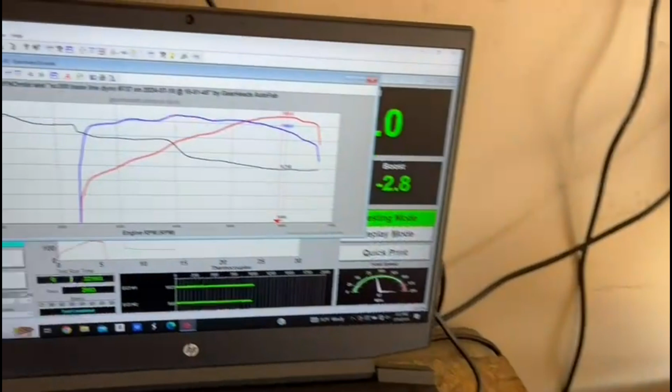Today's the big day you've been waiting for. We're gonna hit the dyno. We're here at Gearhead's Auto Fab with my buddy Jarom. He is gonna help me out with the dyno today, teach me how to dyno. We're gonna see what the SC is making before we start strapping on bolt-ons, before we do a standalone ECU. So let's go check out the dyno, check out the shop.

What's up, Jarom? Hey, how's it going? Good to see you. Good to see you. Hey man, your shop's looking great. You got a sick dyno setup.

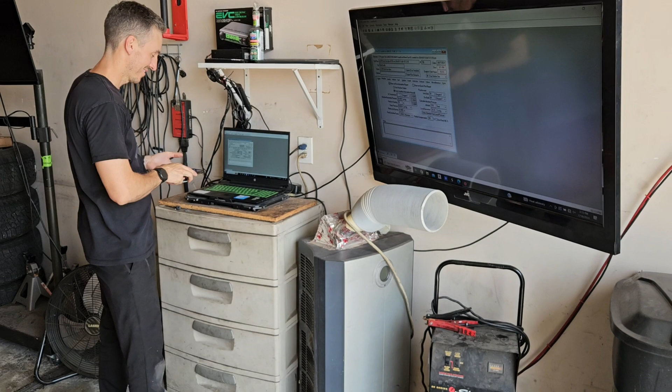Tell us just a little bit about the dyno setup real quick. This is just an inertia-only dyno, so basically there's a big roller in the ground. It knows the weight of it and it can equate your horsepower and torque. Right now I'm putting in the weather and the conditions for the day, and that kind of just gives most dynos everywhere a similar type reading.

So we'll set this all up, and we put in a few factors as well, like the size of the engine and stuff like that. And then we strap it up to the roller and just do a few tests, get a good baseline, and hopefully we can get a starting point for what your car's making currently.

That's fantastic. Well, thanks for having us out. We're really excited to be here, and hopefully the guys online are going to learn a little bit about the dyno process and it might motivate them to come on out themselves. So appreciate you having me out. Yeah, no problem, man.

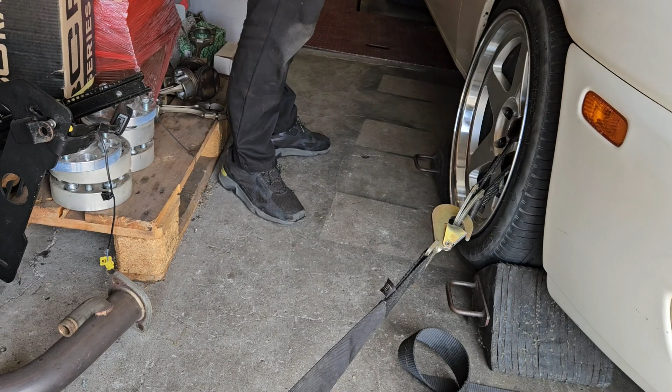All right, so we're chocking it, we're tying it down to the rim. Yeah, just to keep it from moving around too much. Sick.

I'm excited to show you. Yeah, so I ended up pulling out 305 pounds so far. Yeah, that's fine. Just throw the doors away and you'll have 705 pounds. Literally. Somebody needs to make a carbon fiber door shell. Yeah, can you imagine? I actually think it's the heaviest thing on the whole car. Yeah, absolutely. That's what I heard before I bought it.

I wanted to show you this fun one. So Antigravity is like $600 to $800. This one at Walmart, lithium ion, is 175. Yeah, I use the one on Amazon all the time, Noco or whatever that is.

Noco. So Jarom, how long have you been at this shop here? I think I've been here 8 years. Just about 8 years. And then I opened my first tuner shop in 2006. Oh, here, I brought you a water. Thanks. So it'll be like 20 years if I make it 2 more. I'm 18 years this year. Very cool. That's awesome, man.

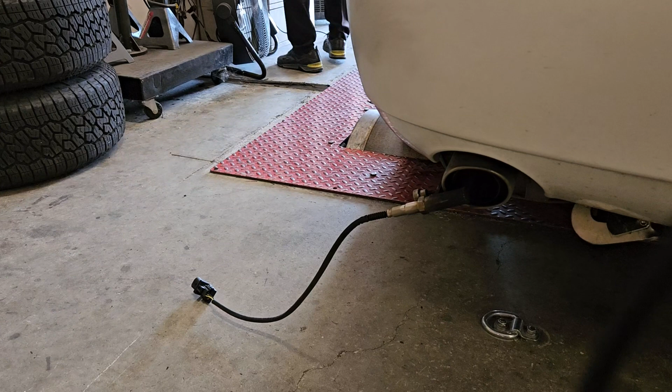All right, so we got the car all set up. What's next, Jarom? Well, it's strapped down, so we're gonna hop in the car and set up one sensor to read the RPM, and then we can start making dyno pulls. All right, fantastic. So what are we connecting here?

This is just gonna read the exhaust. Yeah, this is the wideband air fuel ratio. You were mentioning that you had installed one in your car. This will give us a chance to see if yours is reading similar, just to make sure it's hooked up right. Perfect. That way when you're driving around, if you see weird things, I can tell you what to look for, and we'll know that it's accurate.

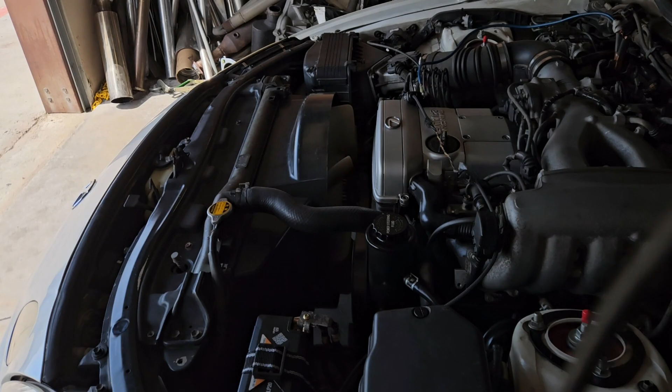That's fantastic. Okay, and then in the front we connected basically a sensor that reads the spark; it's an inductive clamp. So that gives us an RPM reference, because torque times RPM divided by 5252 is how you get horsepower. Fantastic, I didn't know that. That's the equation. Okay, say that one again.

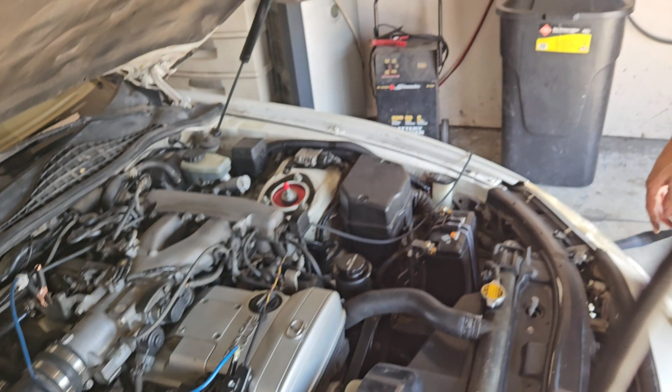It's just basically applied torque. You can only read how hard you accelerate the roller, but they multiply that by RPM over 5252, and that's how you get your horsepower number. Horsepower is just how long you sustain torque. Fantastic. Okay, very cool. I'm learning a lot here. All right, let's start her up.

So we have really good RPM signal now. Awesome. Go ahead and put it in first gear and just lightly, real softly roll forward just to make sure it's centered on the dyno. So you don't have to steer because you're strapped down. Yeah, you just kind of let it chill. Okay. So just go ahead and go first gear like you were going.

Okay. Like you would normally drive? Yep. And go to second gear. Still a 5-speed, right? Yeah, it's the factory 5. That's pretty fragile. Go ahead and go to 3rd gear. And go ahead and just floor it whenever you're ready. And it will record, go all the way to red line, wide open throttle.

Okay, here we go. All right, here we go. All right, we got 1st gear. We got 2nd gear. Here's 3rd gear. All right, let's rip it. Oh!

So yeah, I mean 193 to the wheel. I'll get that read down. Okay, so I have the air fuel ratio sensor hooked up on the back of the car, the one that's coming from the dyno, and we can compare to the one that you installed, you said recently. Yep. This way we can kind of get a sense if they're reading accurately.

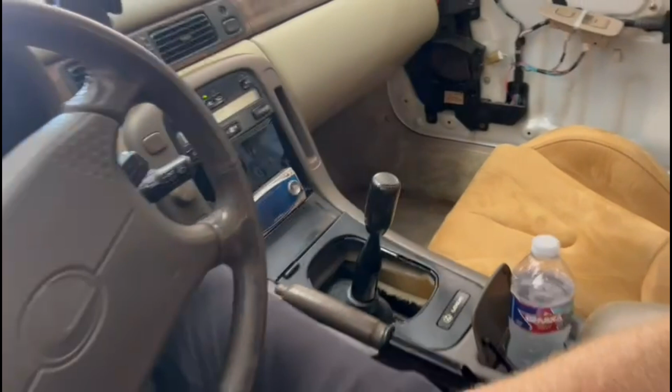And right now, they're really close, right? We're really close. 0.1 or so. Yeah. I mean, really, really darn close. I would say right now, like 0.1, 0.3, yeah. Yeah, and yours is way upstream, mine's way back, and if they're that accurate, I would say that your install went really well and you did a great job. Fantastic, thank you so much.

Okay, let's do this dyno pull and then we'll get to see what your horsepower looks like and what the fueling looks like. Let's do it. Okay, go ahead. Okay, go ahead.

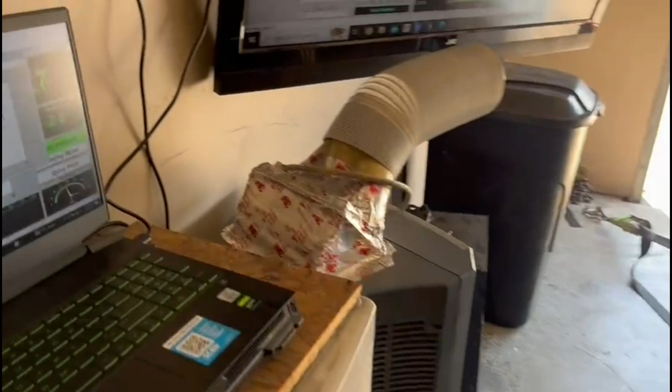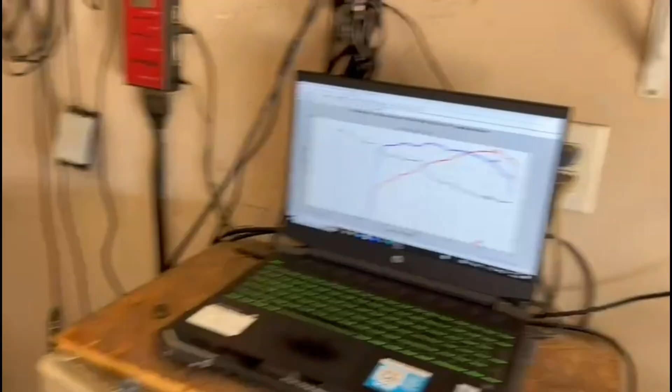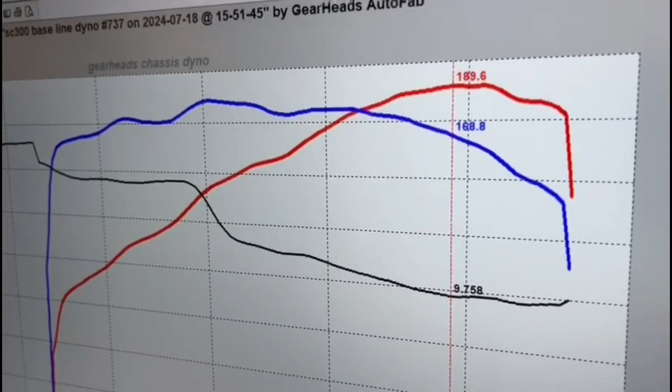Okay, so you mentioned before that it was reading kind of on the rich side. Yeah. I can confirm that it is, yes, definitely fairly rich. Okay. That's what I was worried about. Towards the end of the run, it is very, very rich. 9.7 air fuel ratio. That's super rich. Is that dangerous? No, it's safe. It's really, really rich. It could cause rich misfires essentially, but it's not.

So what I think is happening probably is because the car is heating up. The manufacturer uses temperature to add fuel just to keep the engine cool under certain conditions. Okay. But that is still quite rich, and if we were tuning it, we would just look at the temperature compensations and adjust accordingly instead of just dumping a ton of fuel like the manufacturer did. So they're just trying to make sure in every scenario you can't hurt the engine, you know? So, yeah, that's crazy, crazy rich.

If you notice too on the lower RPM points, it's about where it is under light load. That's almost stoichiometric, that's in the 14s. Yeah. And then it should go into like maybe 12.5, 12.2 even. Right, but it's going all the way down to like 10s and 9s. That's very, very rich. So yeah, there's definitely a lot that could be had with tuning, but it would probably only equate to like 10 or 15 horsepower or something like that. Okay. So it's not too big of a deal.

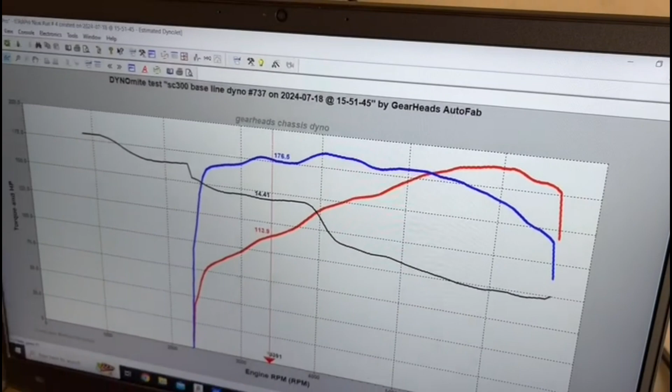And ultimately, since you're not tuning it currently, you can keep the car like this. It'll stay safe under hot days, you know? Okay. Yeah, pretty cool. That is amazing. That's pretty good power for stock, you know? Sweet. Okay, so it going that rich is not dangerous at this point.

No, usually lean is dangerous because it creates more heat and heat creates problems. Right. But rich is okay to a point. If you get so rich that it can't actually light all the fuel and misfires, that can be kind of bad. Mm-hmm. But I didn't hear any misfires. I generally listen for that kind of a thing. Right. So I'm assuming it's just doing what it's been programmed to do for temperature. Right. Okay, that makes a lot of sense.

So somebody else told me, and that's why I'm here to talk to a pro, that we could manually advance timing on this car and get more out of it. Tell me why that's a bad idea. It's not that bad of an idea. You could certainly do it, but it's just a global change. Let me show you in your engine bay really quick.

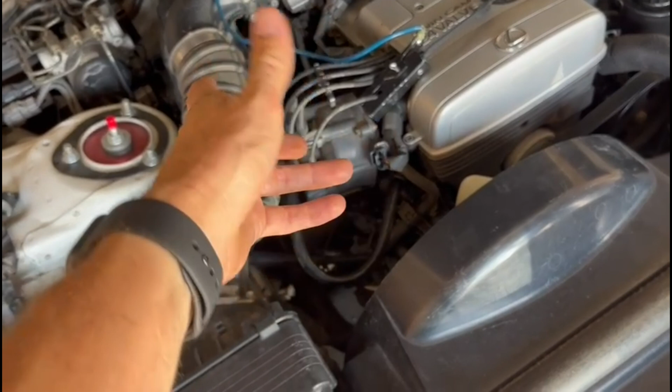All right. Essentially what they mean is you could advance or retard the distributor. So the computer uses the sensors in here to allocate where timing is. And if you rotate it forward or backward, it just moves the entire timing curve forward or backwards.

I would think, because the stock engine hasn't been modified in any way, yes, you could maybe advance it a couple degrees and possibly get something. It's usually not a lot, and it's a lot of fuss for kind of small potatoes.

If you were on something that was tunable, the problem with globally changing something is you can end up undertimed in places and overtimed in other places, just because you're now also giving idle extra RPM. So now maybe idle's really high and lopes or does something weird just to get that extra 5 or 10 horsepower at the top end. Right. So it's marginal and probably not worth it. But yeah, so mechanically it's not on a curve, so you're sacrificing one thing for the other thing.

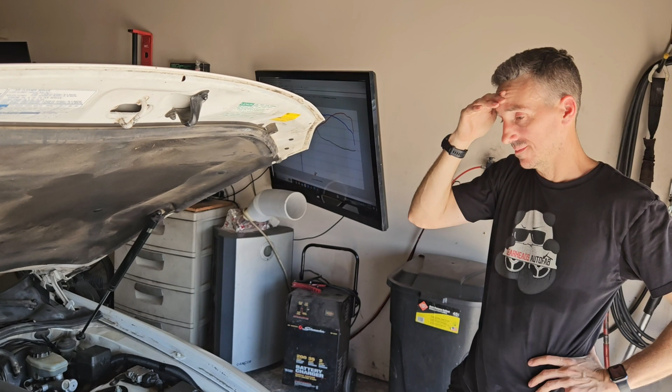Yeah, absolutely. We have bored out the cats. We've done a cold air induction to the stock, which probably didn't do a whole lot. We're getting decent horsepower, is what Jarom is saying. What would you recommend as next steps that would eventually allow me to do big things, but we could do some small things in the interim?

I think the biggest hurdle on any build, and this is kind of how I decide whether to build a car or not, is if it's tunable. It doesn't matter what we do power-wise to this engine, you're gonna have to recalibrate. If there's no way to do that, then you're stuck. There's certain cars where there's no way to retune the factory PCM, and there's other cars where you just have to go to a full standalone computer. You kind of need to make those arrangements first, and then you can really start seeing more data and adding horsepower and tuning correctly for the situation.

Right. And you mentioned the other day, I think you recommended a Haltech. Yeah, it's just easy. I've done a bunch of them, so I have a lot of good base maps for this engine on a Haltech. And the user interface worked really well for this car, so it seems like that company spent a lot of time developing it. There's a few other companies popping up with other ECUs that I've used recently, and I don't like them. So I still think Haltech is the best choice.

Okay, and you mentioned the Haltech 2500. Haltech 2500 is just the highest model, and it has the most inputs and outputs. You may or may not need that. You could probably do a 1500, where it's a distributor car. You probably have less inputs and outputs, so you'd have to look on their website and see what they recommend. Right, and so if we went with the 2500 to get me going to where I could bring it back in here, would that be the ECU and then the harness specific to the car?

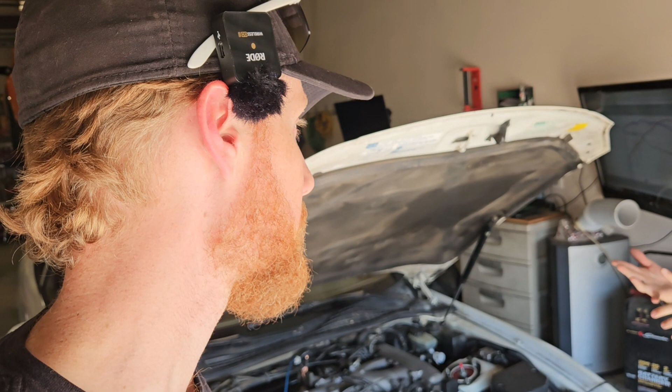Yeah, you get a Haltech jumper. I think they make one that goes from your chassis into the Haltech. And I always tend to buy three things. I buy the jumper harness that connects the ECU, and then I buy their wideband, because their wideband module will communicate over the network, and network speed's way faster than analog speed. I want to have at least air fuel data as fast as possible. Interesting. So from the time you go wide open throttle might be 1/1000, I want it to already be adjusting and predicting, and I need it to have super fast speed. So I always buy the wiring harness, the ECU, and the CAN wideband.

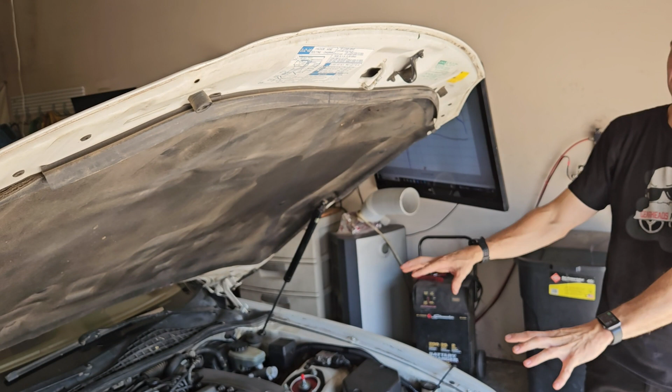Okay, fantastic. And if we did that, you could tune and maybe get a few more horsepower as is, is that correct? Yeah, I would think we'd be able to get a little bit more. A lot of times with all the same factory stuff that the manufacturer tuned with, they probably leave some margin there, but it's probably not huge. 10%? On most cars, and then once you start doing mods, much more. Yeah, so then mods I could do in stages. Immediately turbo it. Well, that would be ultimately, if I could afford it. That's what everybody does, yeah.

I would love to do that, but what if we did something like headers and open up the air box? Yeah, the basic stuff would be headers, exhaust, intake. So just airflow mods. Airflow mods, cooling temperature mods, and then stuff that'll make it feel better to you is what you're already doing with lightening the car. That obviously makes it feel faster. Yeah, you can certainly do that kind of stuff. The other thing you can kind of do preemptively is anything related to cooling.

Like this radiator looks like it's not going to last that much longer. Yep, it looks like the plastic is maybe seeing too many heat cycles, so it might be time to upgrade some of your cooling related items to get ahead of the curve. Like if you go turbo on this car, you make boost, and then all your cooling system falls apart. Maybe you do your ECU so the engine's tunable, you do your cooling mods like oil cooler, coolant stuff, so you're ready for that. And then it makes the transition into forced induction way easier. Okay, well, I think that's the route we're gonna go.

Now, if you guys, I may not have posted that video yet, but if I haven't, I actually installed a Super AFC. I don't have it plugged in right now.

Jarom, tell us why we shouldn't run the Super AFC. We're gonna make sure the guys know not to install the Super AFCs. Why is that bad? The funny thing is I've uninstalled probably 30 of those things in the last 10 or 15 years. When they came out, it was kind of to be able to make some tunability on cars that weren't tunable, in the early and mid 2000s. And the problem with it is if you take a timing signal from a distributor and modify it, you're globally modifying it, which means you're increasing the timing at the high end, but also making issues in other places. So it's hard to explain.

It's worse than that because usually it uses an airflow modifier. So if you use an airflow modifier to fix your air fuel ratio to make more power with air fuel ratio, it will also move the timing accordingly. So if you reduce the fuel to make it leaner to make more power, you're also increasing the timing. So you're making it leaner and over-timing, those two items are how you blow cars up. Too much timing and not enough fuel, that's how you blow stuff up.

Right, so it does them together. Okay, so let's make sure we understand this. It's gonna pull timing, it's gonna make it lean essentially. It could make it lean, and lean is how you blow up a car. Over timing is how it could do either one. It does both. If you try to reduce the fuel to make it leaner to make it faster, it also increases timing. Got it. So with the Super AFC, you actually want to pull fuel out. Yeah, if you pull fuel out, you add timing, which means you're making it leaner and adding timing at the same time, because with a factory ECU, both numbers are going to move. Got it. You're moving it on the map. So if you move the fuel map over, what people don't think about is you're moving the timing map over too in the background, and nobody's thinking about that.